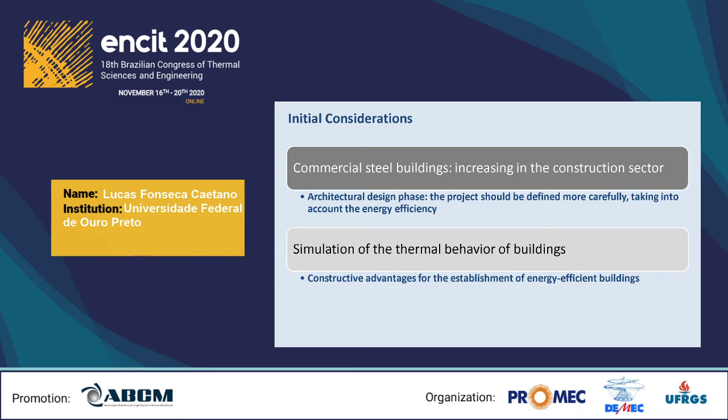In this context, simulation of the thermal behavior of buildings with the use of computer programs has generated several constructive advantages for the establishment of energy efficient buildings. When a high thermal conductivity material is placed in parallel with a less conductive material, or if the area of the exposed steel structure is large, most of the heat transfer occurs by conduction through the steel profile or exposed structure in an effect known as thermal bridge. This mechanism characterizes a reduction of the thermal resistance of the closure system, which causes an increase in energy costs for environment heating or cooling.

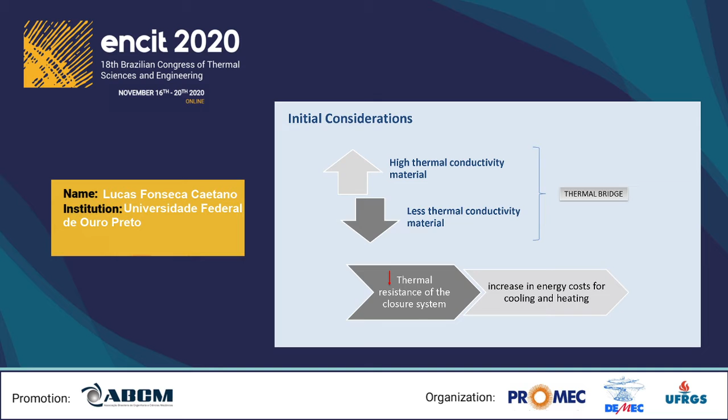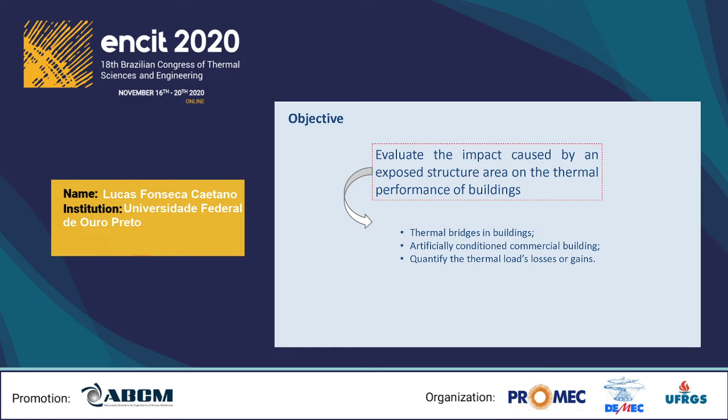So, in this context, this paper aims an analysis of the impact caused by an exposed steel structure area on the thermal performance of buildings, focusing on studying an artificially conditioned commercial building. The adopted method consists of numerical simulations using the EnergyPlus program, version 8.6, which will predict the cooling thermal loads and the annual building electrical energy consumption. The building is simulated drawing directly the surfaces where the thermal bridges occur, considering two situations: building with the presence of exposed steel structure and building without the presence of exposed steel structure, replacing structural steel with a conventional closure system.

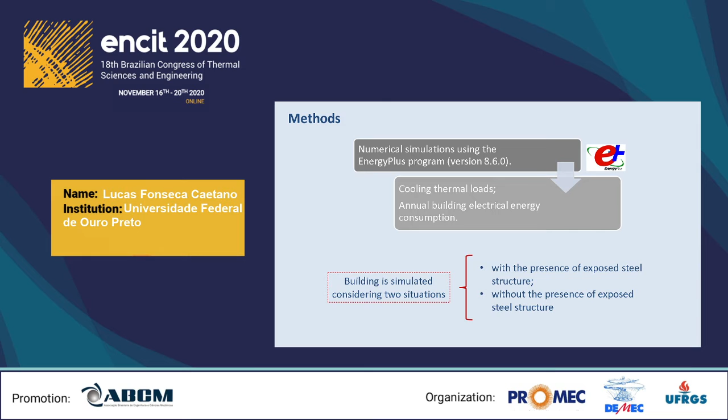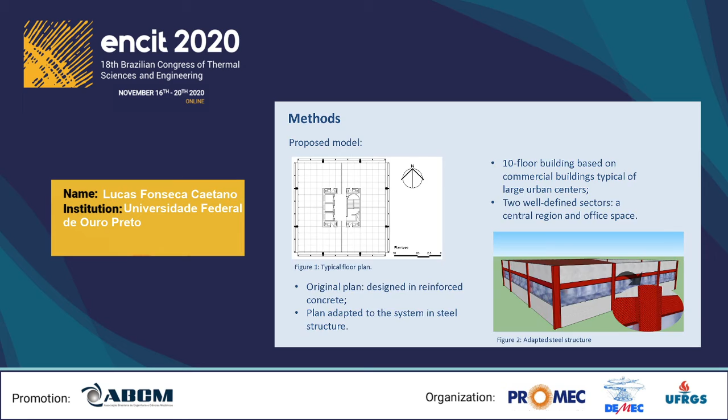The proposed model is a 10-floor building similar to commercial buildings typical of large urban centers, with two well-defined sectors: a vertical circulation, or core, and office space, as exemplified in Figure 1. The typical floor plan presented in Figure 1 was designed considering the structural system in reinforced concrete. Therefore, adaptations of the dimensions were made to adapt it to the system in steel structure, as shown in Figure 2. In any case, the model consists of five thermal zones: thermal zone 1 to 4, Z1, Z2, Z3, and Z4, as office areas, and thermal zone 5, Z5, as the central core or circulation zone, as is shown in Figure 3.

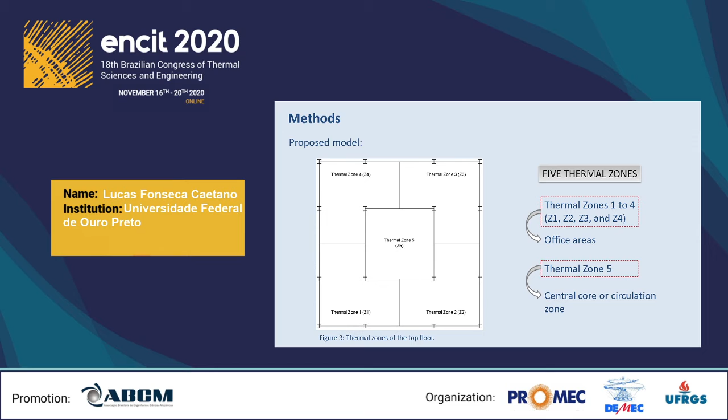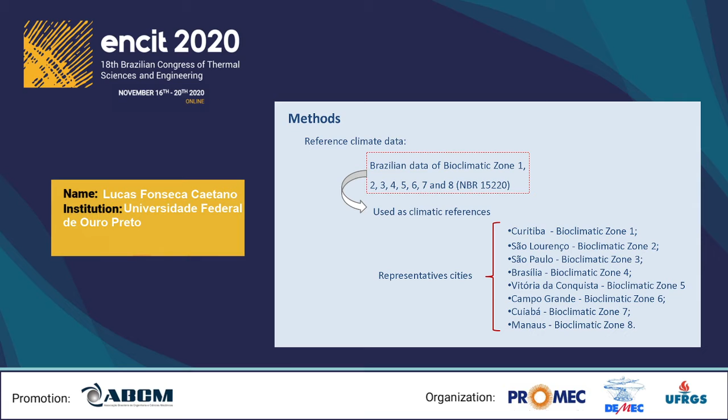In order to carry out the computational simulations, the Brazilian data of bioclimatic zoning provided by the Brazilian standard NBR 15220 are used as climatic references. The simulations are performed considering the cities of Curitiba, São Lourenço, São Paulo, Brasília, Vitória da Conquista, Campo Grande, Cuiabá, and Manaus as representative of bioclimatic zones 1, 2, 3, 4, 5, 6, 7, and 8 respectively.

Following the recommendations of the Brazilian standard NBR 15575, some guidelines were adopted for the standardization of the computational simulations of the building: 2 ambient ventilation rates, 1 air change per hour and 5 air changes per hour; 3 solar radiation absorptances of the exposed surfaces: light color, absorptance 0.3, medium color, absorptance 0.5, and dark color, absorptance 0.7. Considering the analysis made for the typical summer design day, the Brazilian standard NBR 15575 recommends all Brazilian bioclimatic zones should be evaluated. It is defined as the standard of use the air conditioning operating from 8 a.m. to 6 p.m. and a control temperature of 24 degrees Celsius was adopted for the cooling function.

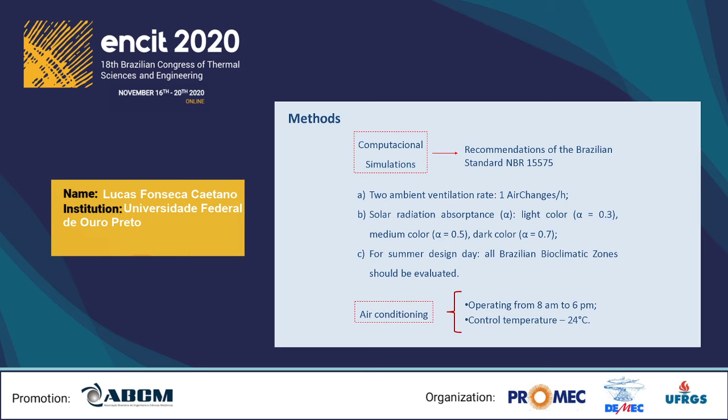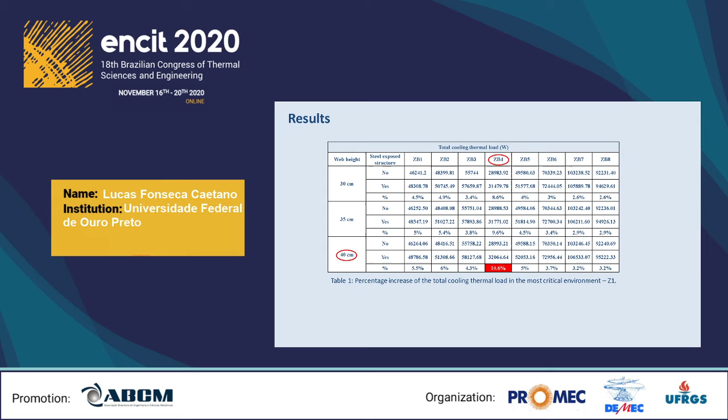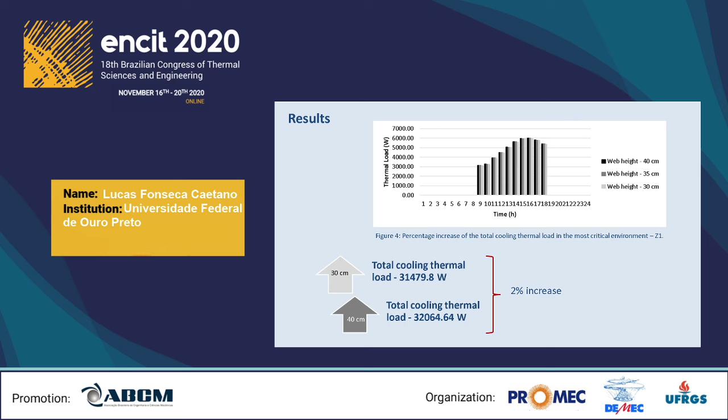Figure 4 shows a comparison of the evolution of cooling thermal load for the most critical case evaluated in bioclimatic zone 4, considering 3 steel profiles evaluated. It was observed that comparing the extreme steel profiles, that is, web heights 40 centimeters and 30 centimeters, there was an increase of about 2% in the total cooling thermal loads of the environments.

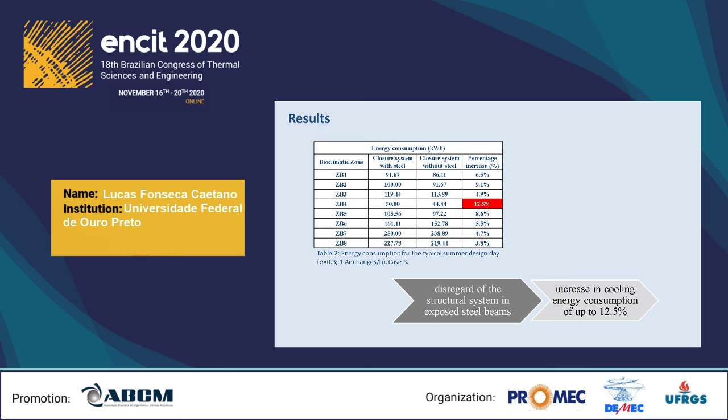Table 2 shows the influence of the steel structure on the electric energy consumption considering the evaluation for the typical summer design day. In general, the structural system is not considered in the simulations of the building's thermal performance. The results presented in Table 2 show that, for the study object of this work, the disregard of the structural system in exposed steel beams can lead to an increase in cooling energy consumption of up to 12.5% for the typical summer design day in the representative city of bioclimatic zone 4. This increase in energy consumption was also very significant for all the bioclimatic zones evaluated.

So, as conclusion, in this study, the influence of exposed steel structure area on the thermal performance of artificially conditioned commercial building was evaluated, considering a structural system with steel profiles and web heights varying between 30 centimeters, 35 centimeters, and 40 centimeters, disregarding the presence of internal heat sources. It was observed that the effects of thermal bridges were more evident in the evaluation made for bioclimatic zone 4. There was an increase of 10.6% in the total cooling thermal load considering beams with a 40 centimeter web height. As consequence, the consideration of the structural steel system in numerical simulations also increased the energy consumption, reaching a maximum increase value of 12.5% in bioclimatic zone 4.

These results cannot be expanded to other building types, since commercial buildings have their own characteristics such as wide and well-defined circulation areas, environments with high ceilings, light internal partitions, facades with large glass areas, and others. However, it was evident that in the structural design, the thermal behavior of the closure system as a whole should also be considered as a conditioning factor when choosing the structure. So, this study indicates that the steel structure should be considered in the early numerical simulation of the thermal performance of buildings, due to the effect of thermal bridges and the consequent increase in costs for cooling.